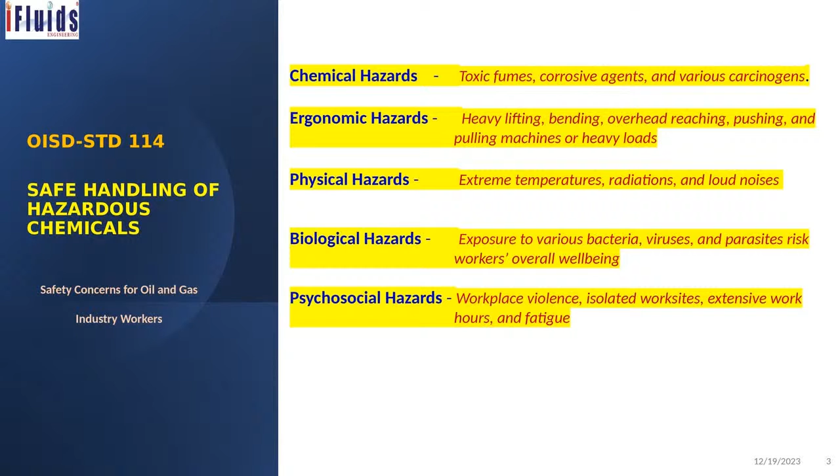Different ways chemicals occur: it is a liquid, solid, gas, or vapor. Gas, I mean pure gas, oxygen, nitrogen, like that. And vapor is ammonia vapor, chlorine, like that. So these are the four ways chemicals appear or are available in the industry.

And what are the categories of hazardous chemicals? This can be corrosive, flammable, toxic, reactive, biological or infectious, carcinogen or cancer causing, and radioactive. So here, the biological or infectious chemicals and radioactive, this particular OISD standard is not discussing. So though it is mentioned, we will not be discussing them. All the other things will be coming in the picture.

Now, there are hundreds and hundreds of chemicals available, and there are some chemicals which are incompatible with other specific chemicals. So it is very important to know such chemicals and their nature so that there is no reaction. Because if there is incompatibility, a reaction happens, and it can be violent or it can produce toxic materials. So that is what is written: chemicals in contact with each other cause hazardous reaction, which may be violent or produce toxic materials.

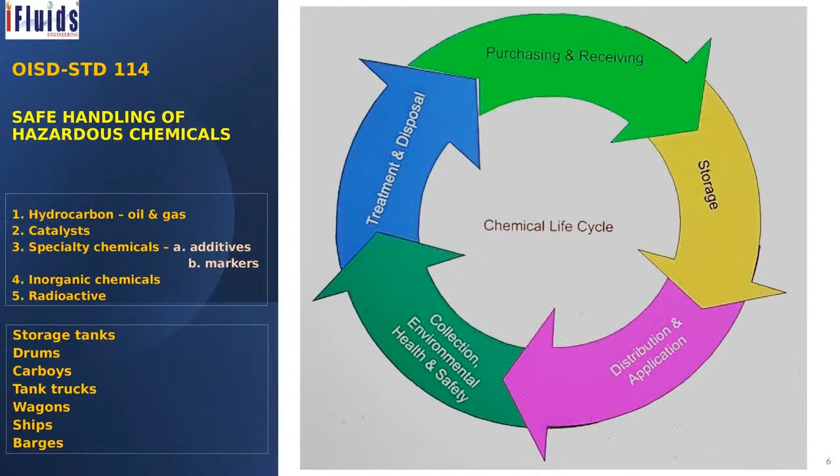So now, what are the principal parameters of storage safety? That is chemical products, storage, and staff responsibility. So under the chemical products, handling, using, and disposal, these three are coming into that bracket. Storage: where it is placed, and what is the condition of the material. These two are coming in the picture. And staff responsibility: those who are actually handling, operating, or maintaining must be trained and must have the experience so that there is no unsafe activity.

So, as I already mentioned, improper storage or mixing of chemicals can result in serious accidents and disasters sometimes. Violent reactions could occur due to mixing incompatible chemicals, which we have seen earlier. So how to handle these things? Inventory control. That is, you don't try to take a very bulk one. Whatever is required, you keep it, and you keep monitoring. That is what it is.

Then labeling. This is a very important aspect because if you don't label, you won't know what chemical is inside. Many accidents have happened because of wrong labeling or no label. Whether it is a refinery or any other place or even laboratories, they have to strictly follow that. In hospitals also, sometimes accidents and casualties happen. I can quote one instance where phenol was injected into a patient's body and the person died. It was due to wrong labeling. So this is very important actually.

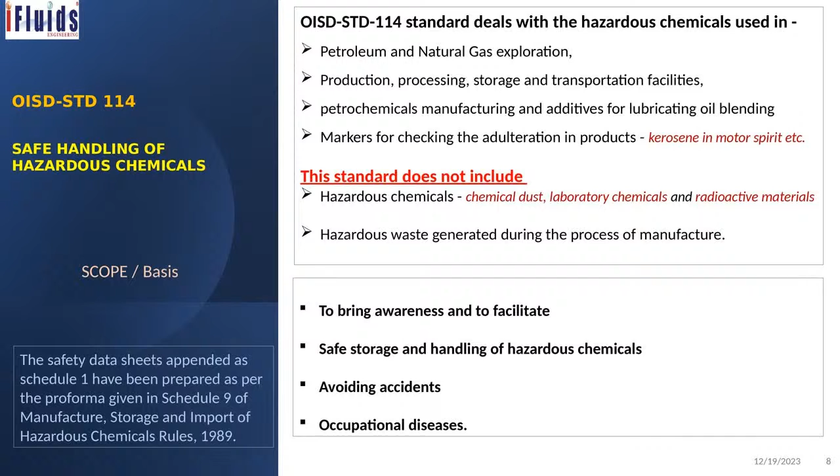So now we will move on to the next one. What are flammable chemicals, which we have already seen? Flammable gases: the gases which at 20 degrees and standard pressure of 101.3 kilopascals ignite when in a mixture of 13% or less by volume with air. Second, they have a flammable range with air of at least 12 percentage points, regardless of the lower flammable limit. These are the conditions under which flammable gas is defined. Under flammable gas also categories are there.

Extremely flammable liquids: the flash point is equal to or less than 23 degrees and boiling point less than 35 degrees. And very highly flammable liquids: flash point less than or equal to 23 degrees and boiling point greater than 35 degrees. So it is classified into extremely flammable, very highly flammable, and flammable liquids. The definitions are given on the right side.

Then another important thing to know is the lower explosive limit and upper explosive limit, because while handling, a person should know these things so that he can be aware and not land into problems. So what is the lower explosive limit? The minimum concentration of vapor required to propagate or ignite a flame.

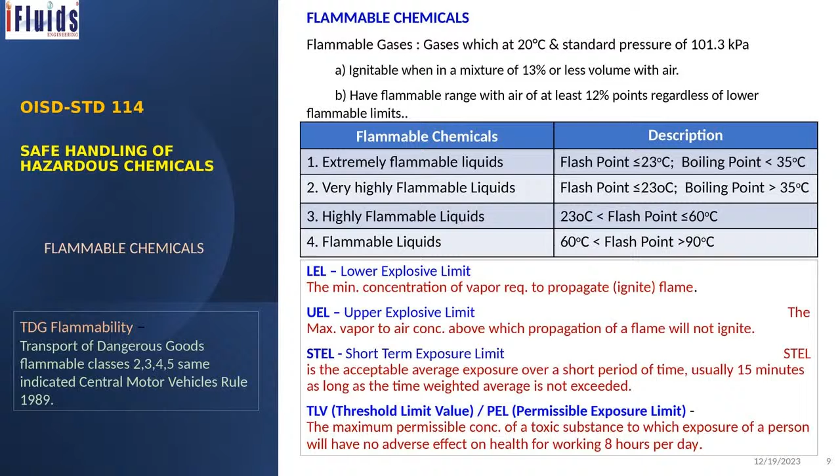There are definitions given in OISD standard 114. Synonyms: common chemical names like acetic acid versus vinegar and caustic versus alkali, so normal names. CAS number is the Chemical Abstract Service Registry number, given by the American Chemical Society's Chemical Abstracts. And UN number: the United Nations has also given numbers for particular chemicals, a four-figure code used to identify hazardous chemicals transported by road, rail, or air. This is followed here also.

And hazardous waste identification number. This means the categories of waste specified in the schedule of the Hazardous Waste (MH&TM) Rules 2008. So wherever these materials or chemicals are handled, if this number is there, one has to take actions accordingly as per the definitions and guidelines.

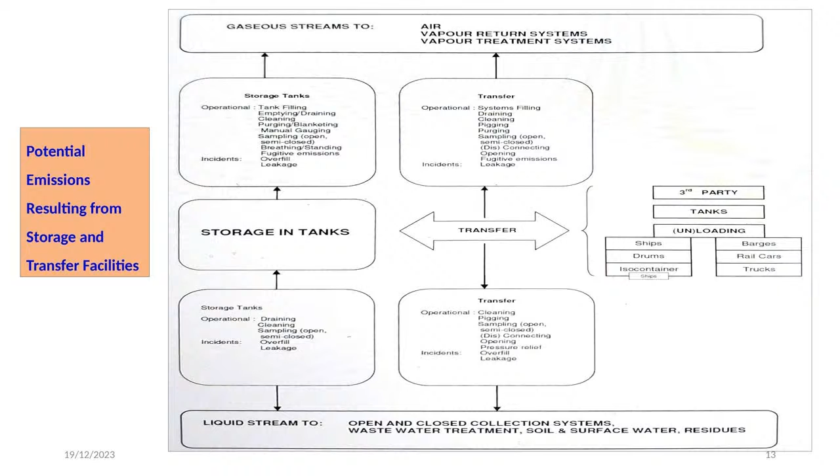Now, if you see in the table, the hazard class of chemicals is classified into: first, poisonous or toxic compounds, water reactive chemicals, carcinogens, teratogens, then peroxide forming chemicals, and strong reducing agents. These are the classifications, starting with the poisonous or toxic compounds.

What is the recommended storage method? Store separately in a vented or cool dry area in unbreakable, chemically resistant secondary containers and in accordance with the hazardous nature of the chemical. The examples are aniline, carbon tetrachloride, chloroform, cyanides, all these things. So, like that, these classifications are given under each category.

The water reactive chemicals, carcinogens, teratogens, peroxide forming, and strong reducing agents. So, for each thing, it is already classified how to store, what are the examples, and the incompatibles.

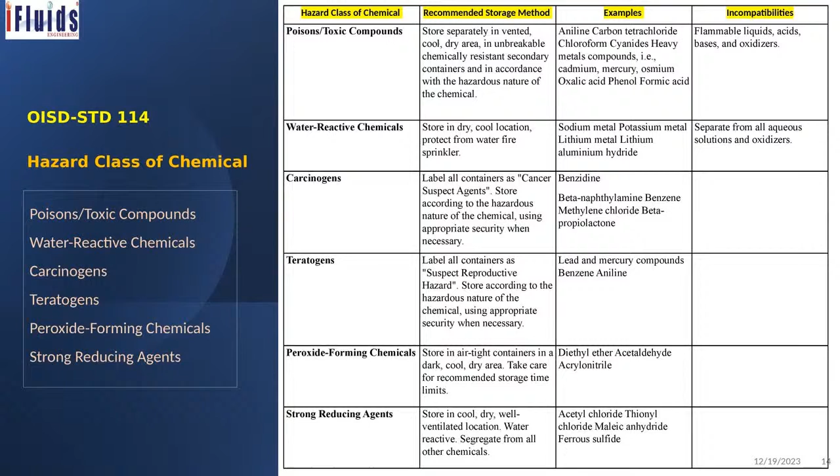This particular table shows how it is to be designed and maintained, what is the fire protection, what is the precaution to be taken for electrical safety, and how to have that safety equipment. So, under the design, location and design of chemical storage rooms and cabinets approved by physical plant and safety office, and under fire protection, a fire extinguisher adjacent to the room, chemical storage rooms electronically monitored by security for heat and fire. This may or may not be present in all the locations. Some locations have it where it is very, very critical.

Then staff responsible must be familiar with the location and proper use of all safety equipment. Like that, under design again, doors locked when the room is unoccupied, because unauthorized entry should not take place and people can misuse or unknowingly create problems. And access limited to authorized persons. Warning signs should be clearly labeled: what this room contains, and that unauthorized entry is not allowed. There has to be clear cut on this one.

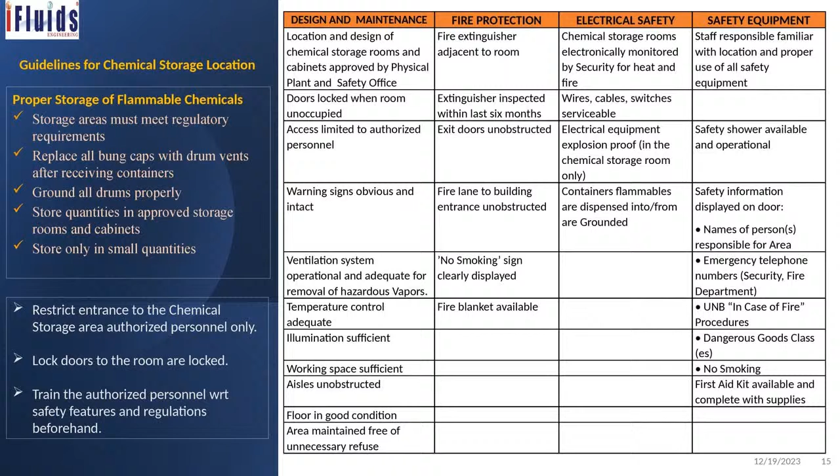So people have to be cautious about these aspects, restrict entrance to the chemical storage area to authorized persons, and lock the doors when not in use. Train the authorized persons with respect to safety. All these things we have seen earlier.

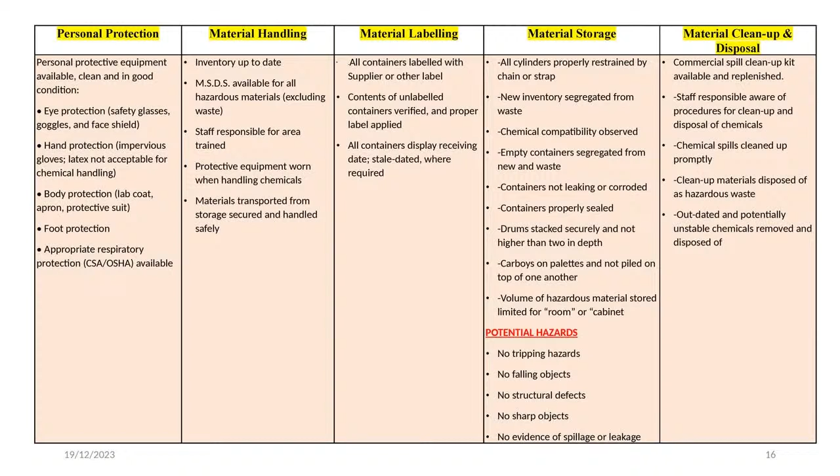Then unusual conditions in chemical storage areas. Most of us would have seen these. This is not correct, this is not safe. That is what it means. Improper storage of chemicals, leaking or deteriorating containers, spilled chemicals, low lighting levels. If the illumination in the area is not good, that also may sometimes cause problems.

Blocked exits, doors blocked open, lack of security, trash accumulation, open lights or matches, fire equipment blocked, broken or missing, lack of information or warning signs. That is, flammable liquids or acids or corrosives or poison should be clearly mentioned. Otherwise, people can make mistakes and lead to problems. Temperature extremes: it should not be too hot or too cold. Storage, whatever it is designed for, it should be as per that.

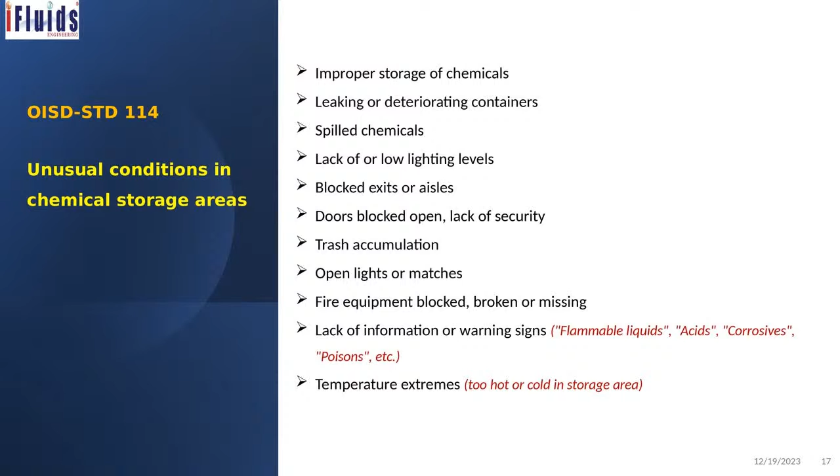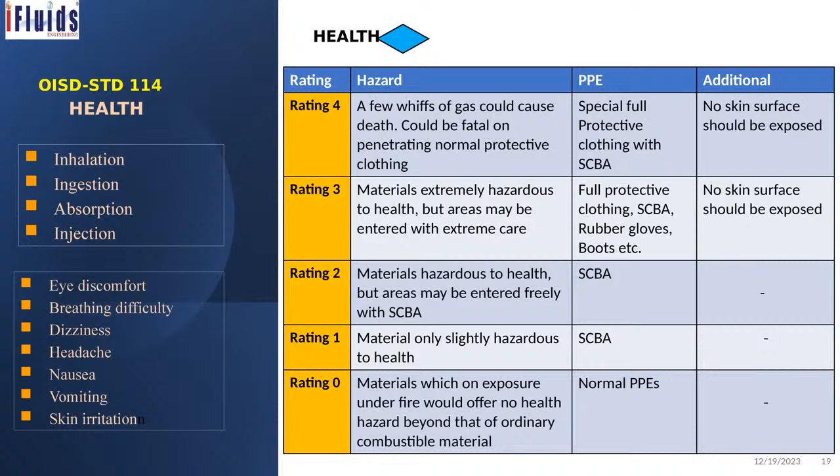And rating 1 is marginal only, slightly hazardous, SCBA can be used. And rating 0 is not much of a concern.

And next is flammability. Under rating 4, very flammable gases, very volatile flammable liquids, and materials that in the form of dust or mist readily form explosive mixtures come in this category. The safety measure is to shut off the flow of gas and liquid and keep cooling water streams on exposed tanks. This is one way of handling. Additionally, use water spray carefully in the vicinity of dust so it does not spread.

And rating 3, slightly less severe: liquids which can get ignited under almost all normal temperature conditions, and solids that burn rapidly.

Water can be ineffective on these liquids due to their low flash point. Any material that ignites at normal temperature. These are the additional things to be taken care of.

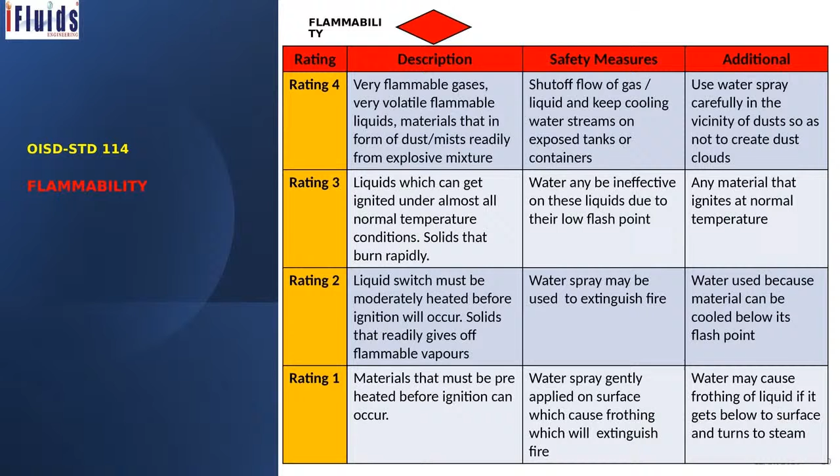And rating 2 is liquids which must be moderately heated before ignition will occur. So it takes time. Water may be used, but though the guidelines are given here, ultimately it has to go with the chemical manufacturer's guidelines or instructions. That is very important. And you have to go with the MSDS. So rating 1 is material that must be preheated before ignition can occur.

Now under reactivity, rating 4 is materials which in themselves are readily capable of detonation or explosive reactions at normal temperature and pressure. This is the explosion definition we had seen. The same thing is given here, and it includes materials which are sensitive to mechanical or localized thermal shock. And for firefighting, if material got massive fire, the area should be evacuated. Same thing given for rating 3, 2, 1, and 0. So this is about the reactivity.

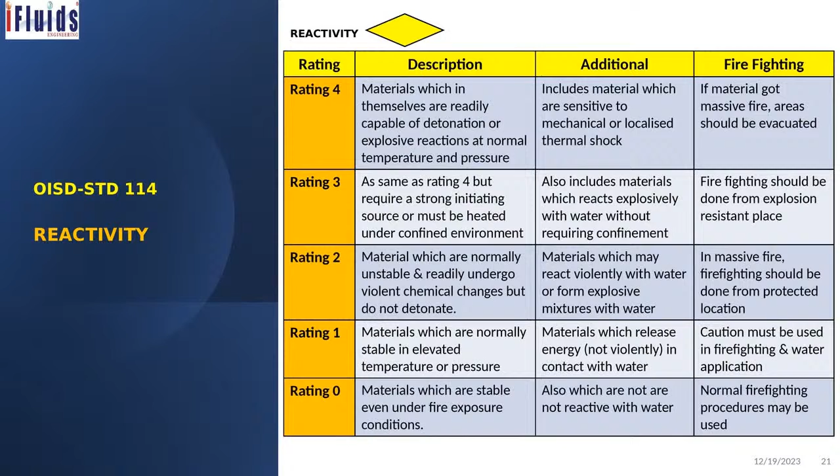So now we are coming to special hazard. This is the white diamond shown here. It is used to identify certain things, like unusual reactivity with water. So W is the water. The cross given means do not use water for this particular chemical. Okay. One example I can give you.

Many years before, I think it was 1984, the Bhopal incident was like this only. They were using methyl isocyanate, which is hydrophobic. Water should not be used. Unfortunately, that particular day, more water entered into the system and it caused a major disaster. Many hundreds of people died in that accident. So this can be that type of problem.

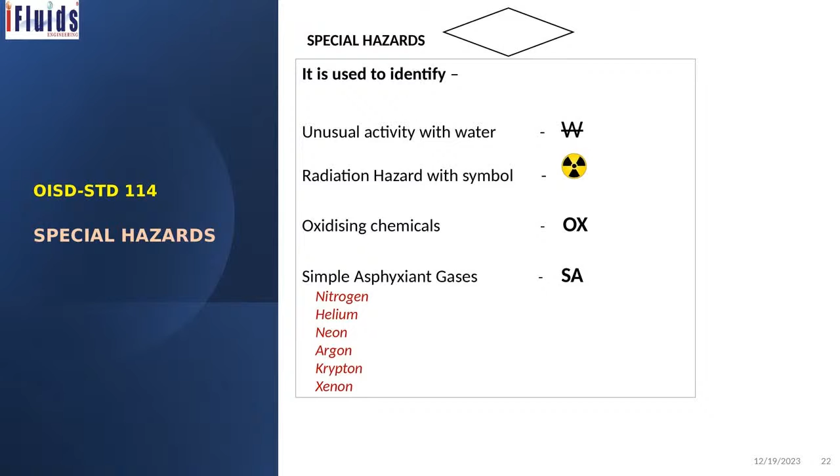Then radiation hazard, the symbol most of you must have seen. Oxidizing chemicals, OX. If the tank truck carrying the chemical or a drum is showing OX, it means it is having an oxidizing chemical, and you have to be really cautious on this. And simple asphyxiant gases, they are nitrogen, helium, neon, argon, krypton, and xenon. So they are notified as SA. If the SA symbol is there, that means they have these gases. So next time, whenever you see such symbols, be aware of this. Okay.

There's a hazardous chemical code. And most of you must have seen the tankers move on the road. You must have seen the NFPA diamond along with this 3YE, 2PE, 2WE given. So what is the significance? That is what it shows. So the code provides vital information to fire brigade and emergency services on action, because by seeing that they can know what type of chemical this tanker is carrying or the drum is having, and based on that they can take the action.

This code provides vital information to fire brigade and the chemical emergency services on action to be taken to combat spillage, leakage, or fire emergency. So it is basically for firefighting people. It is numbered from 1 to 4. Any one of the letters P, R, S, T, W, X, Y, Z can be there, followed by the letter E, or it may not be. If there is E, as this one shows, it is for evacuation.

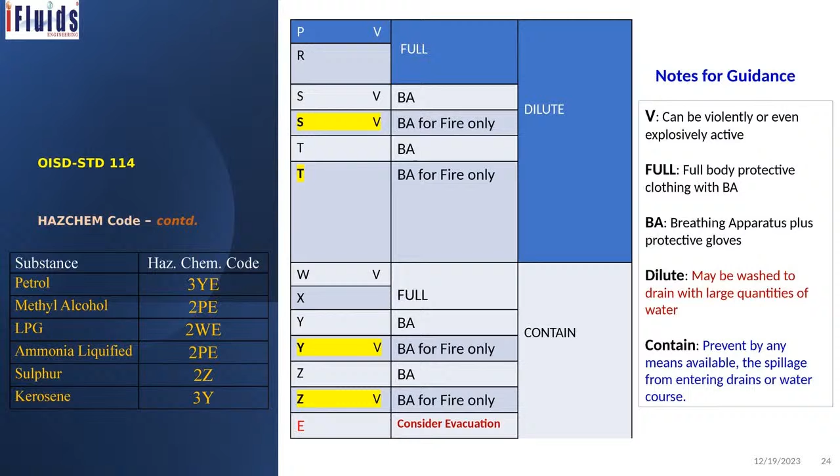So these hazardous chemicals are classified into 8 classes. Under class one, explosives are coming. Class two: gases, compressed, liquefied, dissolved, or deeply refrigerated inflammable gases or poison gases. They are coming under class 2. Class 3 is inflammable liquids.

Then class 4 again is divided into 4.1, 4.2, 4.3. Inflammable solids, next is substances liable to spontaneous combustion, and next is substances which emit inflammable gases with water contact. These are the categories under class 4. Class 5 is divided into two: division 5.1, oxidizing substances, then organic peroxides.

And class 6 is divided into two, 6.1 and 6.2. 6.1 is poisonous or toxic substances. 6.2 is infectious substances. Infectious means it is a health hazard, obviously, it affects the body directly. Then class 7 is radioactive substances. Class 8 is corrosive. So these are the different classes under which chemicals are classified.

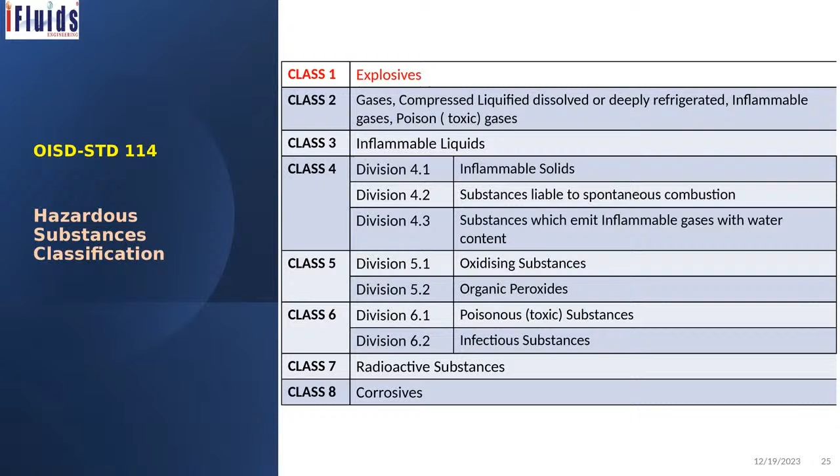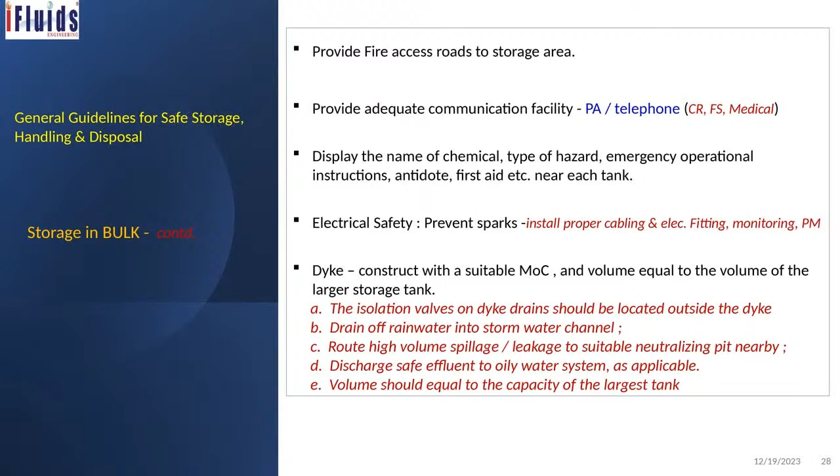Route high volume spillage or leakage to a suitable neutralizing pit nearby. Normally a neutralizing pit is designed nearby so that even if some spillage happens, it will go to the neutralizing pit only. Depending on the severity or type of chemical used, discharge the safe effluent to the oily water system as applicable. In refineries, yes, the oily water system is available. In terminals, it may or may not be, so it depends on the site. Then volume should be equal to the capacity, or slightly more, 1.1 times.

And storage in a container. Here we are talking about drums or carboys. Each drum or cluster of drums can be a source of leak, because drums are susceptible to leaks since they are very thin sheet material. Even slight puncturing can cause a leak, so they have to be handled very carefully. And drums, being less resistant to fire, would collapse faster, escalating the spreading of fire to the other drums. So this is another thing.

And never fill the drum full of liquid, because there has to be some vapor space, so even if there is pressurization, it can take care. Otherwise, it will burst violently. Leave sufficient space for thermal expansion. Then store the drums in a well-ventilated shed with an impermeable floor sloping away from the drums. Even if there is a leak or spillage, it will go to the drainage point freely.

Then keep provision to collect accidental spills for safe disposal. These are all as per the design where it is stored. There are design criteria, and they have to construct or install as per that. And stack drums in a single tier at the correct lid position.

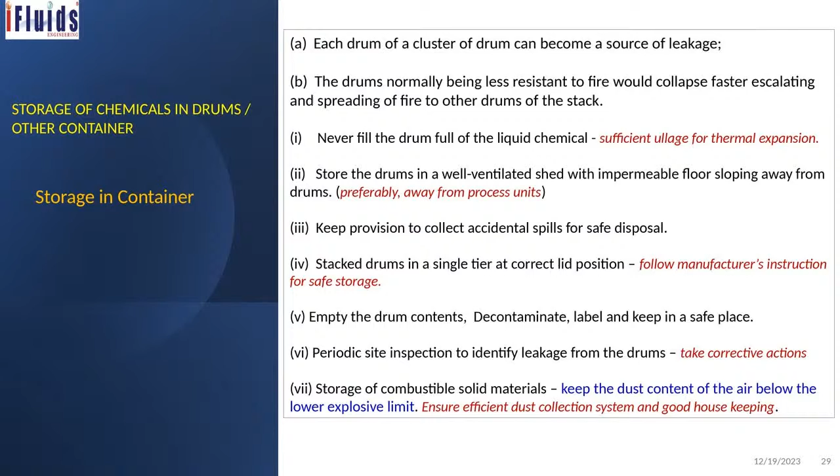But after a few days, we found pigeons dead on the drums or nearby. Then we realized that the pigeons had come to drink water, and they thought this particular liquid was water and they drank. And it was not suitable to them and they all died. This is the extent of what can happen.

So knowingly or unknowingly, we may cause a problem to human beings as well as others. So one has to be really cautious about it. Then we took strong action to decontaminate and all those things. Okay. So I'm just telling you, wherever you people are working, you have to be cautious about these things.

Keep them away from steam pipes, furnaces or boilers, and avoid any hot object striking the cylinders, because the cylinders are very heavy. If they strike each other, a spark is possible, and that spark can cause fire. That is why this point has come. Do not keep them near gangways or elevators, because while rolling they may strike other cylinders.

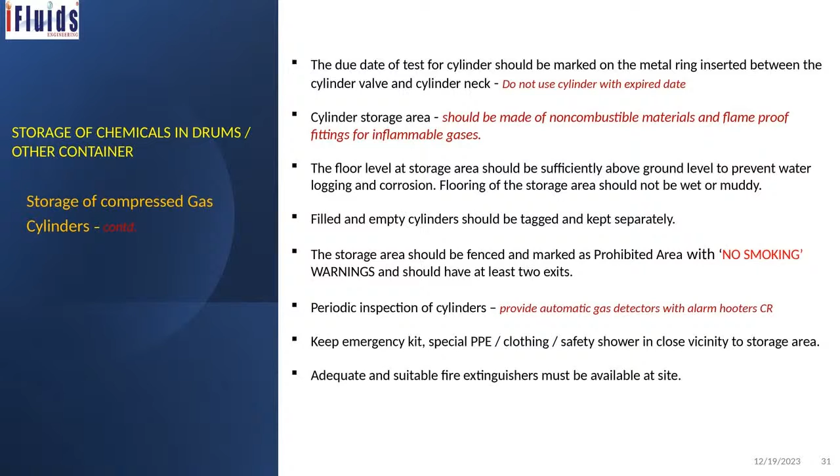Adequate and suitable fire extinguishers must be available at the site. This is all as per the standard. Then ensure proper color coding of chemical cylinders. For color coding, on the left side I had given the table. This is the Indian standard, and it should be followed. So next time you see any cylinder, check whether it conforms to these color code standards. They are supposed to be using this. In hospitals also, most of you must have seen oxygen cylinders; the same color coding is there.

There is a rule, the Gas Cylinder Rules 1981. Based on that, this standard has come. Then avoid manual handling. Unload the cylinder with a forklift or hoist, etc. Direct heating with steam or flame is prohibited. If you want increased flow of gas, use a vaporizer, but never use steam or flame. Obvious it is.

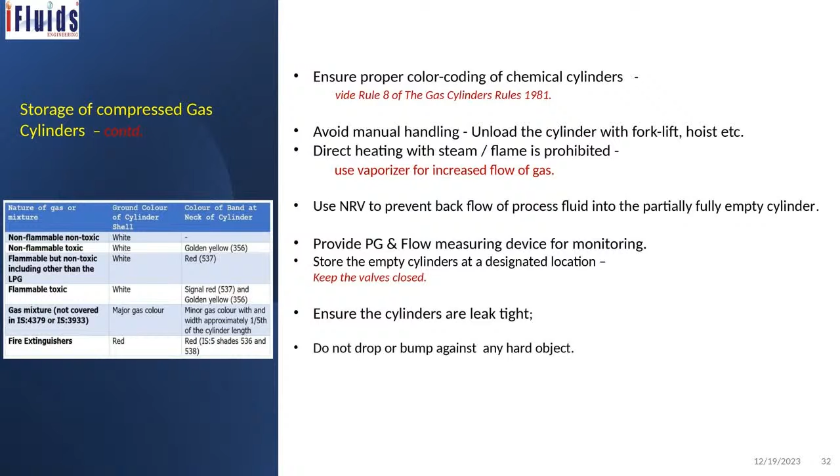Use an NRV to prevent backflow of process fluid into the partially or fully empty cylinder. Because when the cylinder pressure comes down, the material from the other side can back into the cylinder. That should be avoided. That's why an NRV is required. And provide PG and flow measuring devices for monitoring; those who have handled chlorine will know there will be a pressure gauge and a rotameter or another device for measuring the flow. Then store the empty cylinders at designated locations. Ensure the cylinders are leak tight and do not drop or bump against any hard object.

Now, the unloading of tank trucks or tank wagons, because chemicals are transported in bulk also through tank trucks, and they go through open roads. Inside the plant or company premises, you can take many safety precautions. When it goes on the road, the safety aspect is much more important, because the public may not know, it is an open area, and no one knows how to handle it. So that is the problem, and one has to be very careful.

A lot of restrictions have come on this: inspect the tanker before entry into the industry premises. The tanker can take material from the factory outside for distribution, or it may bring chemicals from outside into the refinery premises. Both ways it is possible. Inspect the tanker before entry into the premises, for authorized entry and safe, sound condition, and its contents.

They will check the invoice. All these details would be given, and normally the MSDS also comes along with it. Security is supposed to check the invoice, then verify it with the tanker. So there's a clear-cut procedure for all these things. Before entry, ensure the tankers are fitted with flame arresters on their exhaust, because sparks can come out from the exhaust. That is why the flame arrester is required.

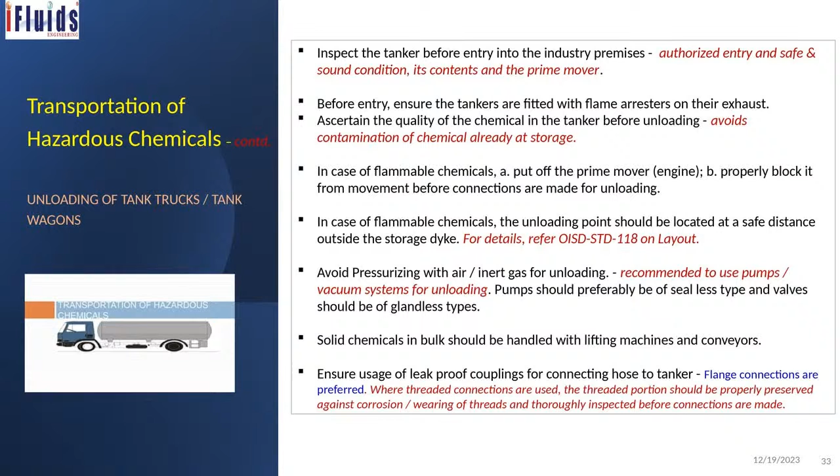So the unloading hose should be devoid of cracks. This is another thing. So the hose should be monitored and tested periodically so that you ensure a good standard hose for all these things. The hose should be able to withstand the temperature and pressure also. Then same hose should not be used for unloading different chemicals. This is another thing because, as we have talked about earlier, the chemicals may not be compatible. Then there is a big problem. So designated hoses should be used for that purpose only.

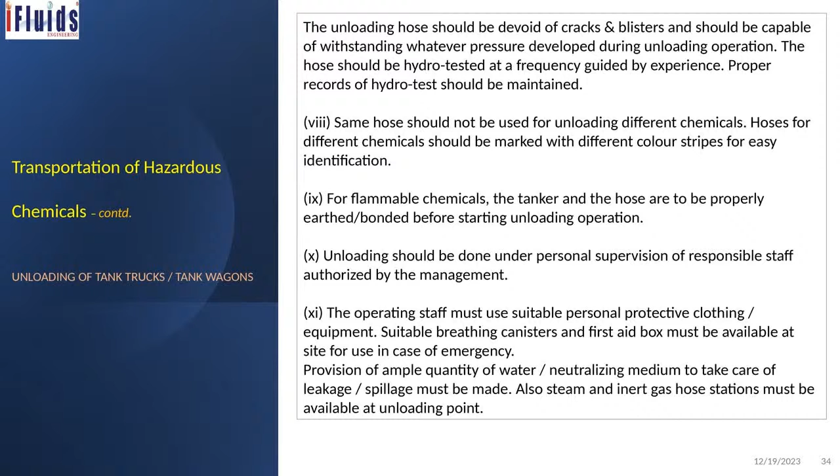Then for flammable chemicals, the tanker and the hoses are to be properly earthed. This is to avoid the static electricity and spark problems. And unloading should be done under personal supervision of responsible staff. Obviously, operating people should be there while it is unloading, because even if something happens, they can take the corrective action immediately. Otherwise, things may go out of hand. Then operating staff must use suitable PPE, suitable breathing canisters, and all those things as specified. So there is no issue on that.

Then ensure adequate illumination with the flame-proof fittings. Lighting should be good because the operation is on 24 hours basis. So night time also this may happen. So lighting should be good in that area, to identify any untoward incident happening and take actions accordingly. Ensure that the unloading systems have facility to vent or drain the remaining chemical in the hose to a suitable safe point. This is already designed. So as per the design, it should have that facility, then there is no problem. If there is no draining facility, then there is an issue. Normally, they are designed.

For starting unloading, check the ullage of the receiving tank, because you should know how much the tanker has brought, what is the material inside the tank, and how much more material the tank can take. This is very important. Otherwise, if it is not checked, it can overflow the tank. Tank overflow can be possible. So that's why this is required.

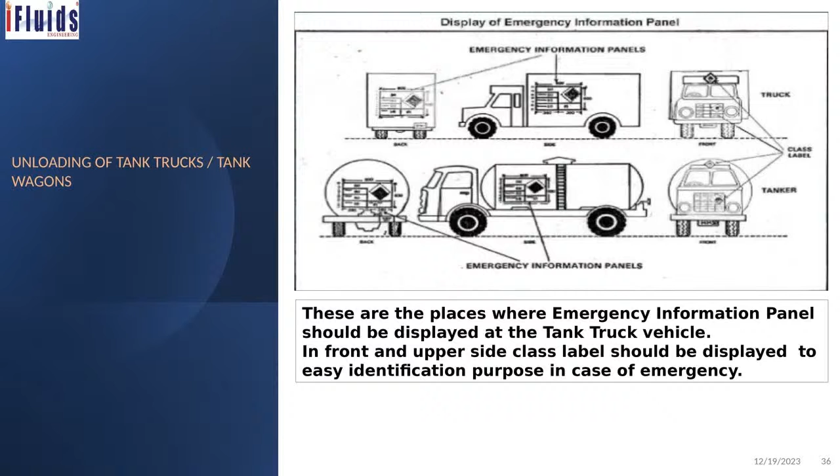So now, safe disposal of empty containers of hazardous chemicals. Safe disposal of empty containers should be done based on the guidelines given by the manufacturer, because each manufacturer gives the guideline how the empty containers have to be disposed. Many times, they may take back the container. That is the best thing, so that there is no issue. Otherwise, if it is not there, then you should decontaminate and safely dispose of. This is all given by the manufacturers, so their instructions have to be followed.

Second is safe disposal of stock of expired hazardous chemical. The chemical which is already expired has lost its capacity, but still it will have some side effects, so it has to be disposed of carefully. In such cases, again, the manufacturer gives the guidelines how to dispose of chemicals which are expired.

Then, as a precaution, first in first out practice should be adopted. Normally warehouse people are supposed to maintain this to ensure consumption of chemicals before reaching the expiry date. But sometimes the requirement is not there, and it may lie for many years. For example, a gasket may lose its validity over a period of time. Though the gasket does not come into the chemical category, I'm just telling it as an example. So one has to be careful with this.

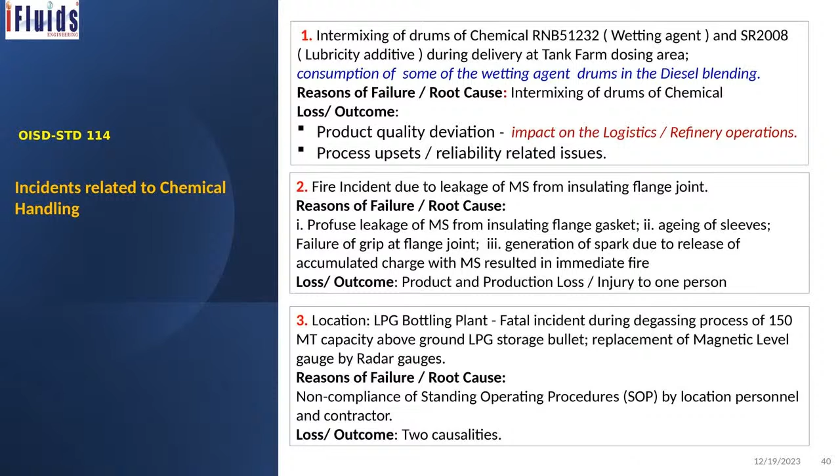They were trying to replace the magnetic level gauge by radar gauge, and they didn't follow the proper procedure, so non-compliance of standard operating procedures by location personnel and contractor. So loss or outcome was two casualties. So people should be more careful handling such chemicals. Many accidents occurred due to lack of understanding of the safe handling of hazardous chemicals or non-observance of its inherent safety measures. This is the thing which will come out in any accident.

So one has to be really cautious about this and must be trained well and know what they are doing. That is important. This understanding is a must and useful for the safety of the persons in charge of the work, the safety of the persons in charge of the process, and risk management of the process and the equipment. If that happens, it can save your life and others also. Thank you.

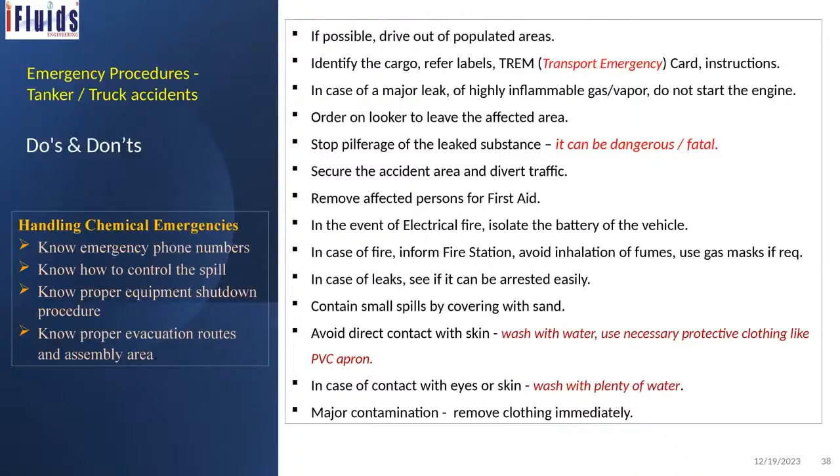Mr. Chetan Patel, can you brief your question? Can you elaborate your question? Okay, sir. If he responds, I'll get back to that question, sir. Otherwise, we'll move forward to the next question, sir.

Please brief on chemical transportation, TREM card, stationary requirements, requirements for tanker, cargo, loading from bottom to top, vapor space ratio to liquid space in it. See, this is too technical. I didn't want to go for that. Depending on the design, depending on the instructions, this is all handled. This cannot be generalized just like that. This will be too technical to tell here at this forum. You have to go to a particular site and they specify you have to maintain such pressure, such temperature, all these things, and you have to go by that.

Okay, sir. Please brief on tonner for Cl2 and SO2 handling. Chlorine is clearly specified in the refinery area. SO2 normally they don't handle in the refinery premises. There are some set restrictions. As for the chlorine, I can tell. As per the design, it is supposed to be in an isolated area at an elevated place. I think it is all mentioned in the OISD 114 itself.